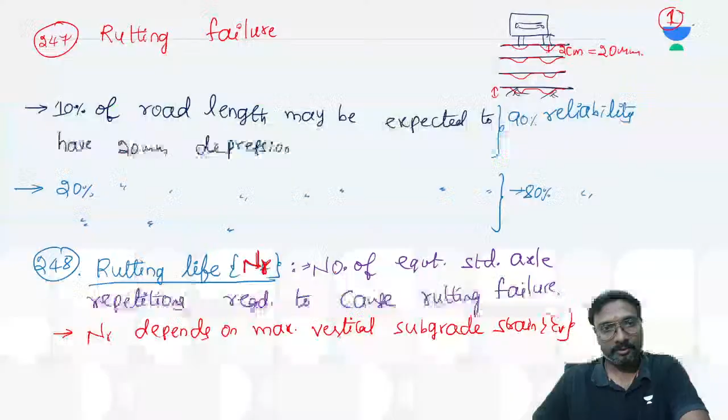So what was done - rutting, failure, fatigue, flexible pavement - everything gets covered, including indicative VDF values. This rigid pavement we have just started. In this, design life is already over - rigid pavement design life of 30 years and 20 years we have taken, because these values are different from flexible pavement values. In flexible pavement those values are different, and in rigid pavement those values are different.

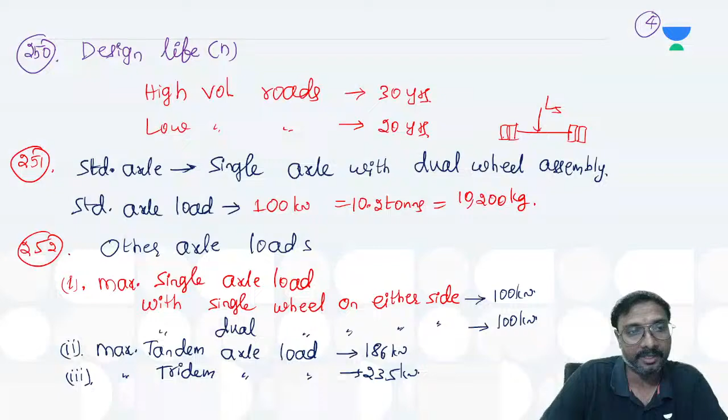Standard axles are also defined - 251, 252. For other axles also, we have defined the different standard loads we have to select. Apart from that, CSA, rigidity factor, vehicle damage factor, lane distribution factor, equivalent single wheel load factor, equivalent axle load factor, or equivalency factor - all are similar to flexible pavement only, so we are not writing separately. Extra parameters are radius of relative stiffness and equivalent radius of resisting section, those things L comma B.

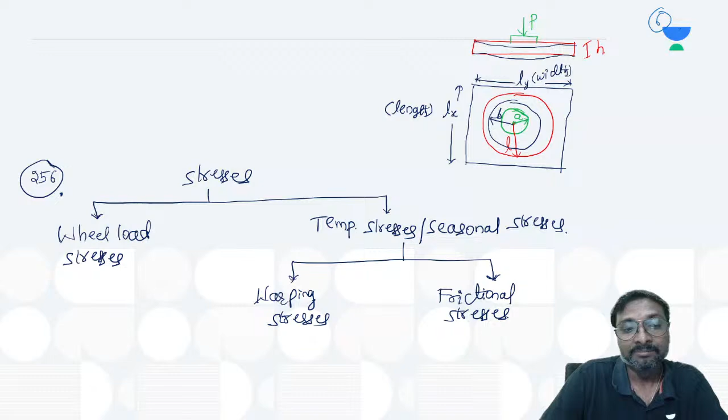And what is this one? These are the different stresses we'll be having. These are your different stresses.

Point 257: nature of wheel load stresses. Whenever it is interior wheel load, load is acting at the interior portion, so it acts like a simply supported slab. Whenever it acts like a simply supported slab, what happens - top compression and bottom tension.

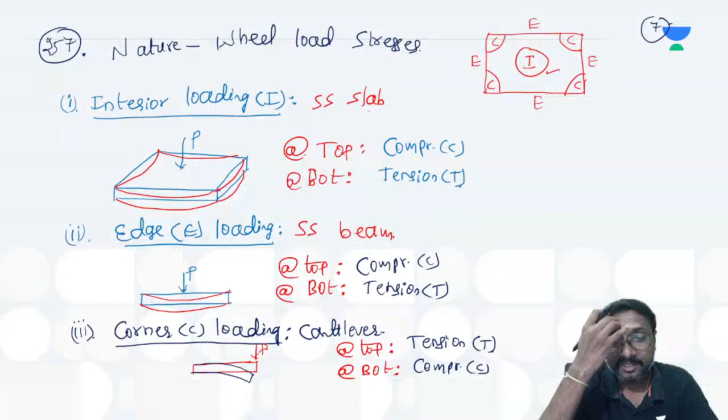Edge loading is like a simply supported beam, same top compression and bottom tension. Corner loading is top tension and bottom compression, because it has this cantilever behavior, if you just write it.

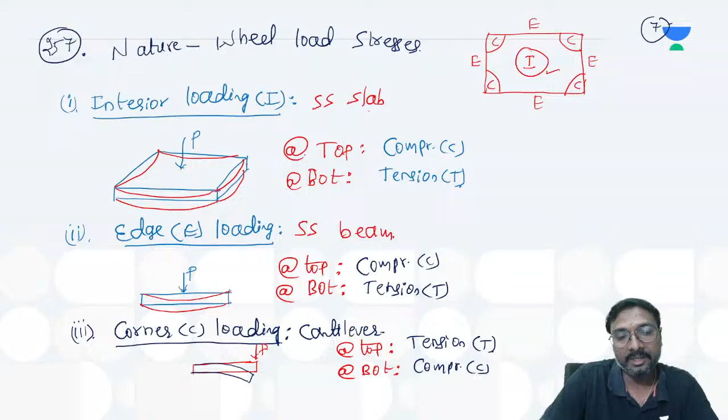Now shall we see first the values of these wheel load stresses? Then nature and all these things we'll see later. This is your 257th point - this 22nd class, quick revision of Highway Engineering, Rigid Pavement Part 2. And now 258th point.

This is your first slide for today's class. So wheel load stresses - nature of wheel load stresses we know, and the values of wheel load stresses we have to see. What are these values of wheel load stresses? If you observe, there are different formulae you are having - Westergaard formulae as well as IRC formulae.

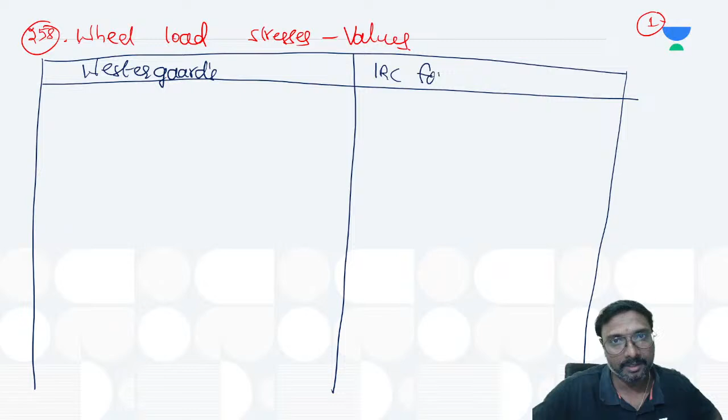So what is that Westergaard's formulae? Westergaard is the fellow who gave the formula for these slabs. Because we are considering slab action for rigid pavement, we need to also consider the same parameters as that of a slab only. Westergaard's formula, next is the IRC formula.

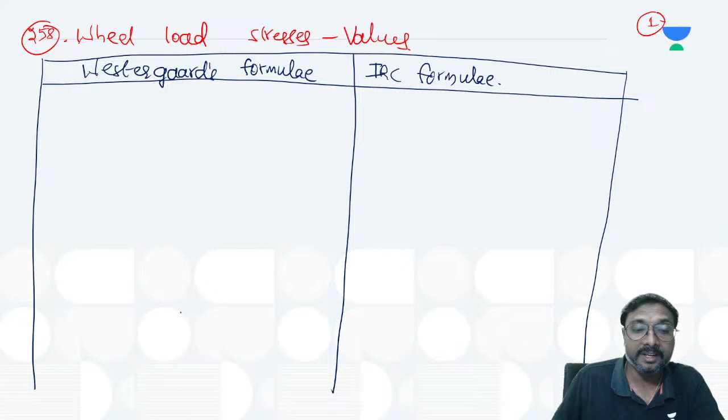Now three different loading conditions are there, and we have to calculate the stresses at these three different loading conditions only. What are these three different locations? If you observe, the three different locations will be interior loading, edge loading, as well as corner loading.

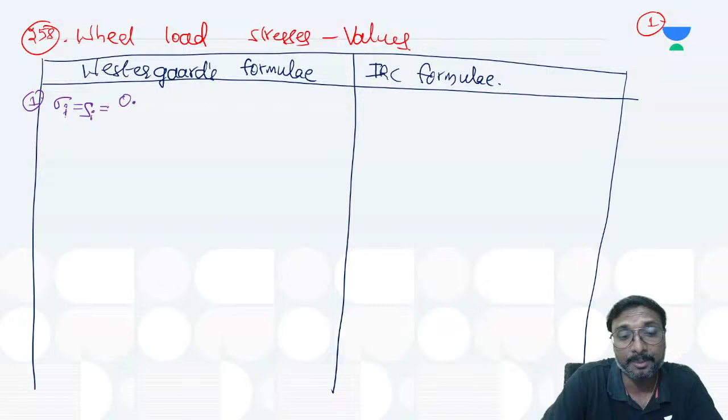So now what is the first one? Sigma I, SI - Sigma I is nothing but the stress, the wheel load stress, at the interior portion. Just no other suffix is given, means just sigma or SC is given. What is it? It is wheel load stress.

0.316 P by H square into 4 log L by B - you have to remember this, because sometimes they may ask you to identify the formula directly. Log to the base 10 plus 1.069 - this is given by Westergaard.

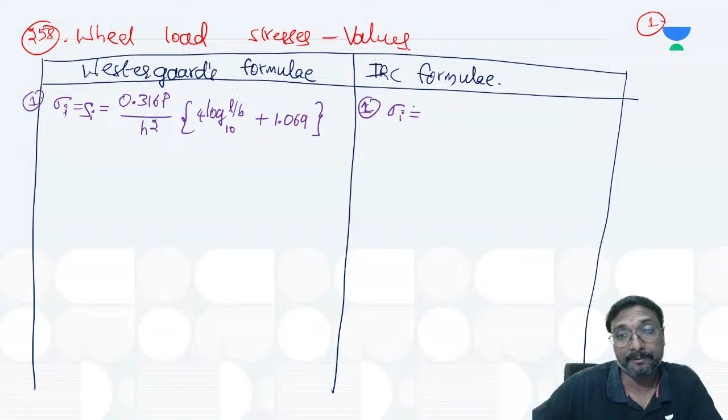First one, sigma I, IRC formula for interior loading. Sigma I or SI, if you observe, is the same. What is the meaning of this? Do is nothing but the same, if you observe. Next, what is the second one - edge stress, sigma E or SE will be equal to how much?

0.572 P by H square into 4 log L by B to the base 10 plus, instead of 1.069, it is 0.359.

But this IRC formula has been modified, if you observe. Sigma E, or SE, will be equal to 0.529 P by H square into 1 plus 0.54 mu, into 4 log L by B to the base 10 plus log B to the base 10 minus 0.4048. That is what you are having.

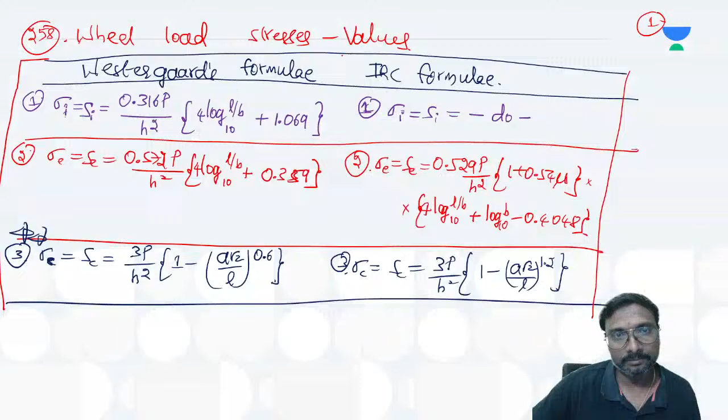This corner stress formula you have to remember compulsorily. Corner stress given by Westergaard is lesser than the corner stress given by IRC. So what does it mean? It means that IRC formulas are more conservative than Westergaard's formula.

What is the meaning of more conservative? Safer side, they will be giving. IRC formula will be giving higher stresses. Whenever it is giving higher stresses, you will be designing for these higher stresses, so is that safe side or not? Obviously yes.

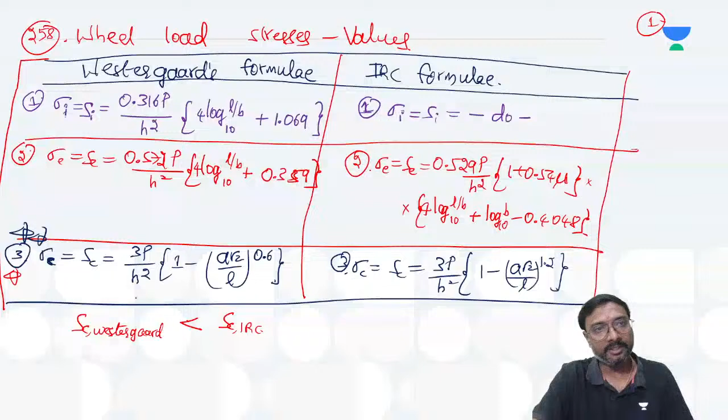So I'll be writing that point in the next slide: that is your 258 and this is your 259. So what is that IRC formula?

IRC formulas are more conservative than Westergaard's. Why is it like that? Since a root 2 by L is lesser than 1, automatically a root 2 by L power 0.6 will be higher than power 1.2. Now higher powers will result in a lesser value, because this value comes to be lesser than 1, so this kind of situation will arise.

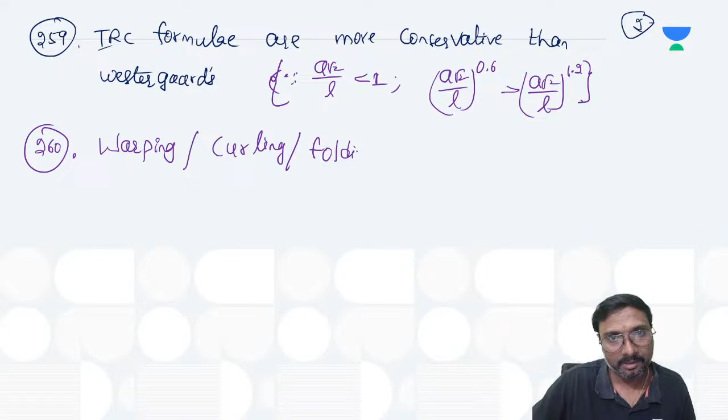So like that. Now the next stress will be warping stresses, or curling, or folding stresses. These are mainly due to temperature variation.

Temperature variation, if you just observe, isn't it?

Temperature variation - which one are we considering? Summer to winter, or daytime to nighttime and nighttime to daytime? These warping stresses in nature are mainly due to the daily variation of temperature.

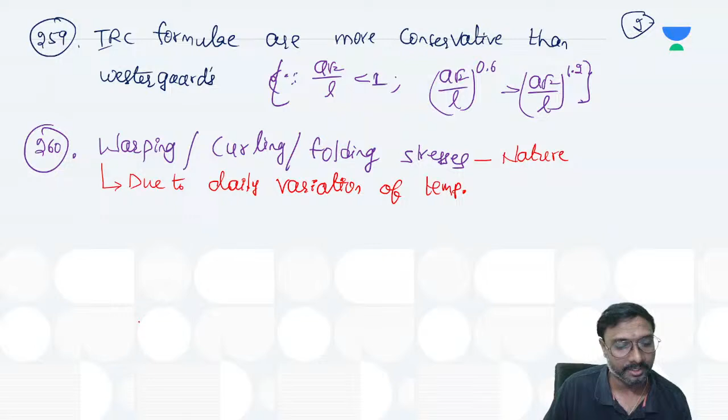Daily variation of temperature - consider daytime and nighttime. During the daytime, the sun will be there; during the night time, the moon will be there.

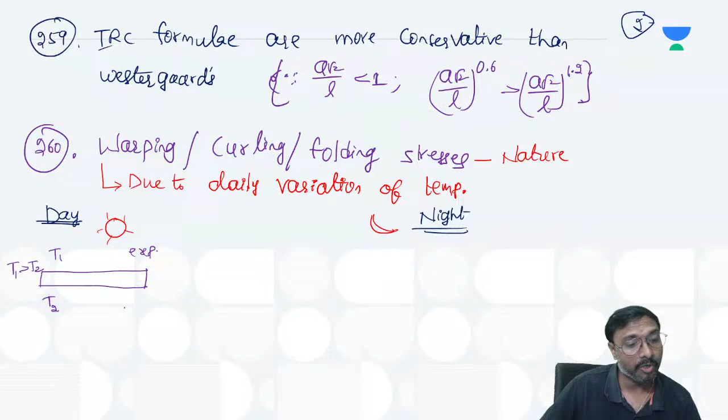Now consider the pavement. The top temperature will be T1 and the bottom temperature will be T2. Definitely T1, the top temperature, will be higher than T2, the bottom temperature. So top expansion will occur and bottom contraction will occur. Now it will be expanding in this manner - the deformation profile comes to be like this.

So top expansion, bottom contraction. Expansion means increase in dimension - how can you avoid that? By applying compressive resistance. So at the top you have to apply compressive resistance. Bottom contraction means decrease in dimension - how can you avoid that? By means of tensile resistance.

So what is the nature of stresses at the top and at the bottom? At the top, the nature of the stress is compression, because expansion will be resisted by compressive stresses only. At the bottom, it is tensile stresses, because contraction will be resisted. These are applicable at all three locations: interior, edge, as well as corner.

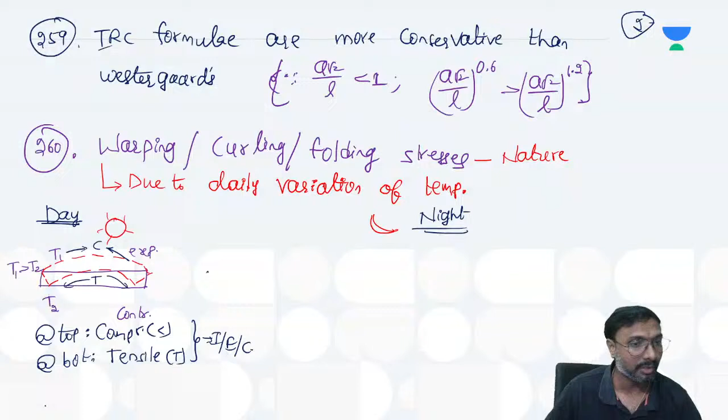Now during this daytime, is it warping or folding in the upward direction or downward direction? It is warping down. Here, higher temperature at the top, lesser temperature at the bottom - it is getting folded in this manner. So that is your warping down.

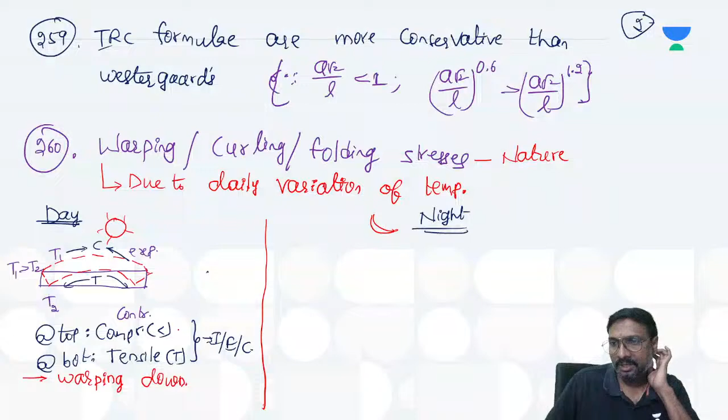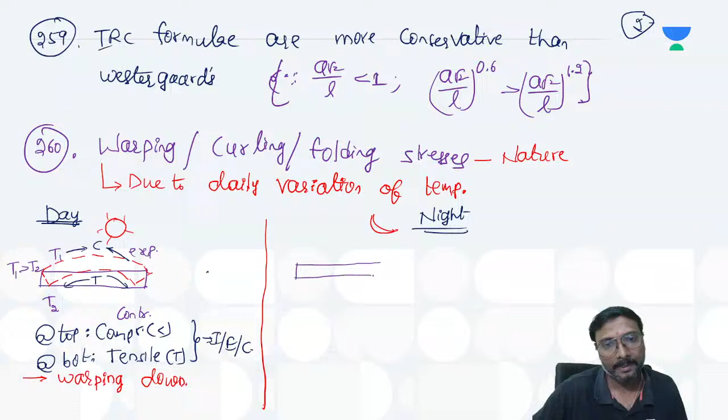Now coming to nighttime conditions - during nighttime, the bottom temperature will be higher and the top temperature will be lesser. So this is T1, top temperature, and this is T2, bottom temperature. Which one is higher? T1 will be lesser than T2. So bottom expansion will occur and the top will contract.

This bottom expansion will occur, right? What is the bottom expansion? If you just observe, expansion can be resisted by which one? This is a compressive resistance, this expansion at the bottom is resisted by this compressive resistance, na?

Contraction at the top will be resisted by which one? This is a tensile resistance, na? Isn't it? Resisted by this tensile resistance, right? So if you just observe what is the nature of these stresses at the top and bottom. At the top it will be tension, na?

At the top it will be tension, and at the bottom, right, what is it you can say? At the bottom it will be compression, na? So these are applicable for which one? This is interior edge as well as which one? This corner, right? Now if you just observe, temperature at the bottom is higher, temperature at the top is lesser,

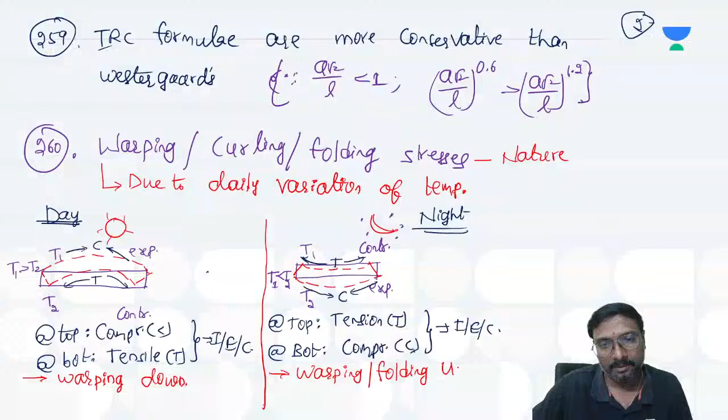So we'll be having this if you just observe. So warping stress under which condition, you can say? If we just observe, warping stress under this daytime and this nighttime condition, na? Warping stress under which condition, you can say? That is your daytime and nighttime conditions we have seen if you just observe. Is it? Yes, na? Like that.

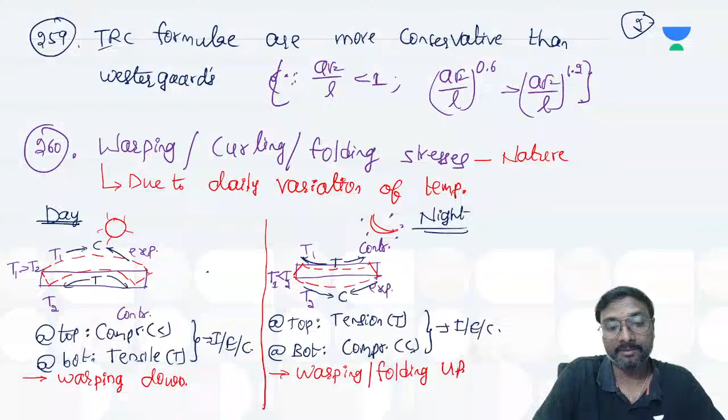So here, nature of this warping stresses is only important for us, or amount of this warping stress is also important, right? Amount of this warping stress is also important, obviously, na? Yes, that amount of warping stress is also important, right? That is your 260 and this is your 261 point. If you just observe, what is that warping stress values?

So these are given by which one? Bradbury's formula, na? These are given by which one? This Bradbury's formula, right? What are these Bradbury's formula if you just observe?

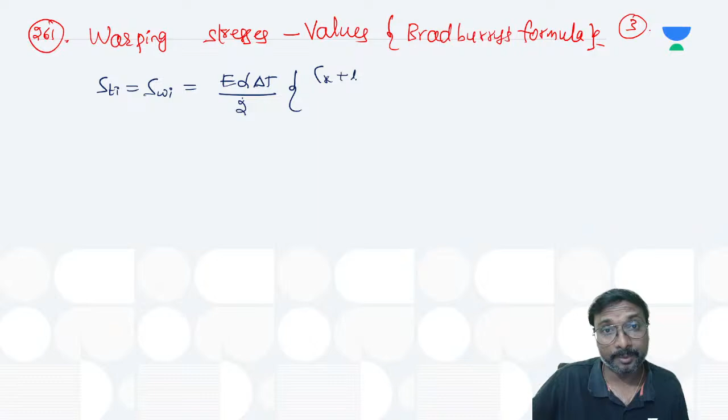So warping stress, temperature stress at this interior, you can also give the symbol W, warping stress at the interior, that is equal to which one? E alpha delta T. Delta T is the change in the temperature from daytime to nighttime and nighttime to daytime. E alpha delta T by 2 into, what is it you can say? Cx plus mu Cy divided by 1 minus mu square. That is for the interior portion.

And temperature stress at the edge, or warping stress at the edge, will be equal to which one? How many edges will be there? One edge is along the length, other edge is along the width. And E alpha delta T by 2 into Cx, this is along the length, na? Divided by, or you can say it as E alpha delta T by 2 into Cy, right? That is along the width, you can say if you just observe.

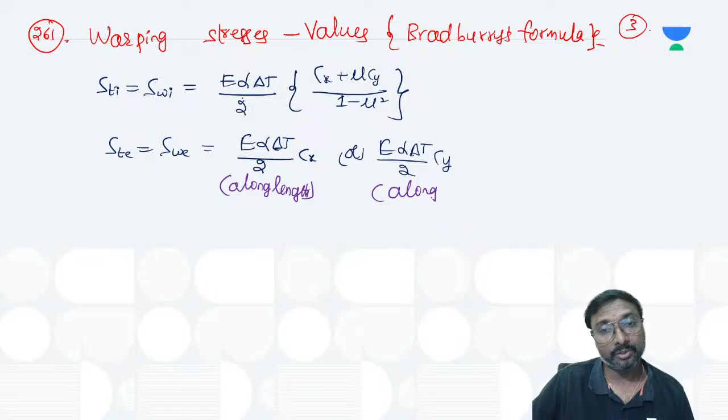Is it? Whenever that warping is occurring along the length, right, this will be used, na? Whenever the warping is along the width, we have to use this, na? That Lx will be the symbol used for which one? This length. Ly is the symbol used for which one? This width, you can say.

Now SWC, warping stress at the corner or temperature stress at the corner, right? What is it you can say? E alpha delta T by 3 into 1 minus mu into, what is it you can say? Under root A by L. What is that A, you can say? Radius of this wheel contact area, equivalent radius of this wheel contact area.

Originally it is rectangular curve, but we are converting that into which one? This equivalent circular, na? Yes. L is radius of relative stiffness, or radius of area over which stiffness is required.

That is what, or it is the radius of this area over which what happens, you know? Radius of this area over which what happens, that deflections will occur, right? Wherever deflections are occurring, there only we need that stiffness, definitely or not?

Yes. Suppose if deflections are not occurring, right, what is it you can say? Deflections are not occurring, right, what is it you can say? Stiffness is required or stiffness is not required, you can say, right? Stiffness is not required. Already stiffness is there, is it not? Right?

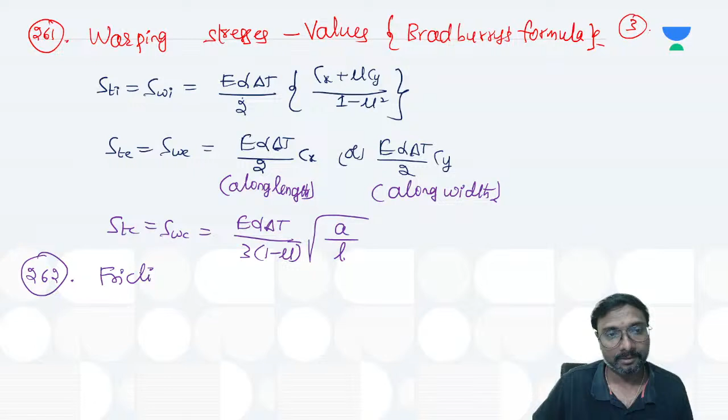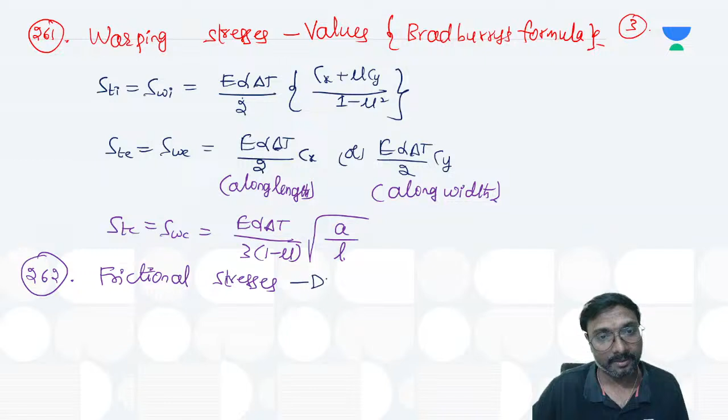Frictional stresses - what are these? If you just observe, these are mainly due to the seasonal variation of temperature, isn't it?

So what are these seasons? If you just observe, summer as well as winter. So whenever it is summer, what happens to frictional stresses?

Just the nature only we will consider, not the values. After that we'll write the values. And the nature of these stresses - whenever it is summer, what happens? Tell me.

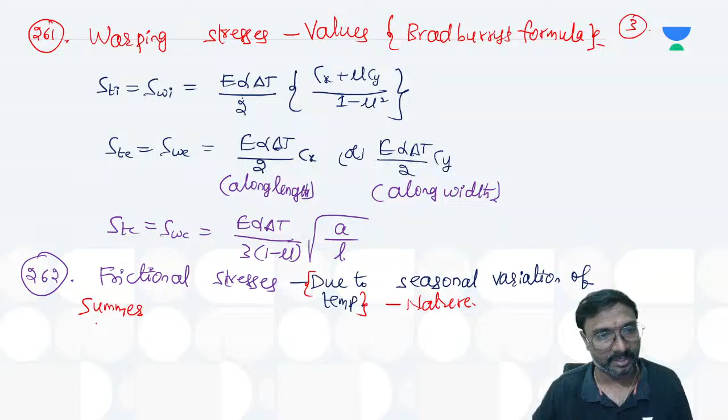Whenever it is summer, top and bottom expansion only will be there. This top and bottom expansion will be resisted by top and bottom compressive resistance - just now we have seen this, right? Top and bottom expansion will be resisted by top and bottom compression.

So top expansion, bottom also will be having this expansion only. So both expansion means it will be expanding like this, along the length, along the width also it will expand - I'm just showing it for one.

So top and bottom expansion will be resisted by top and bottom compression, obviously.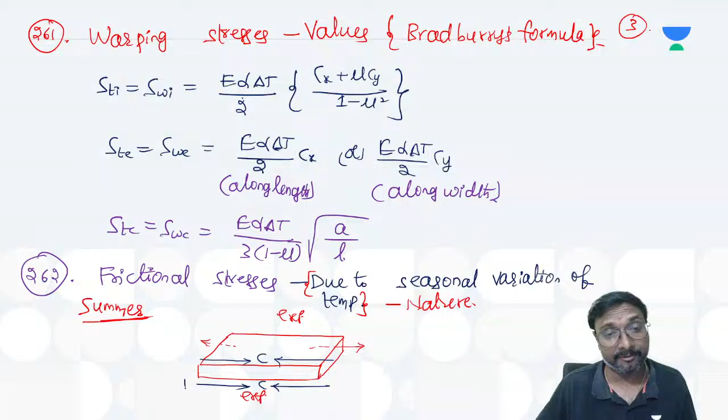Who will be creating that compression? That friction will be creating that compression. So what is that - coefficient of friction into normal reaction, right? You can say that is half of this weight.

So here, if you just observe, what is the nature of stresses at the top and at the bottom? You can say top and bottom - this expansion, top and bottom expansion will be resisted by top and bottom compressive stresses.

Compressive. So these are applicable for what? For the interior portion, edge portion, as well as corner portions. That is the nature of frictional stresses.

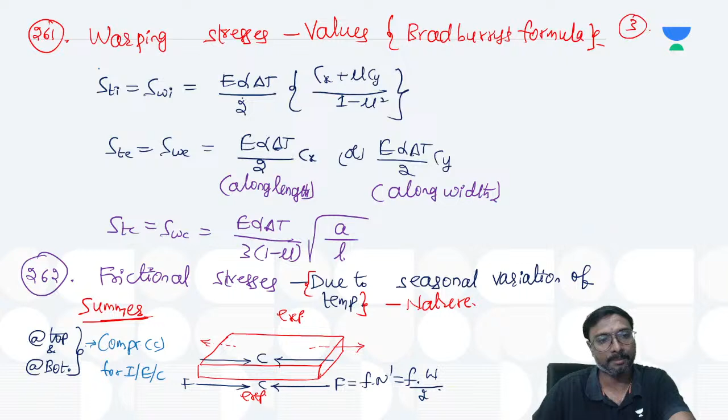Next - that is for summer. Similarly, directly I'll be writing. Similarly, what happens in winter? In winter, reverse process will happen.

At the top and bottom, whenever it is at the top and bottom, what happens? The nature of stresses will be tensile stresses. Nature of stresses will be what? Tensile.

Tensile stresses - these are applicable for which portions? Interior portion, edge portion, as well as corner portions.

Now, nature of these frictional stresses we know in summer and in winter. What is it - values of these frictional stresses, if you just observe?

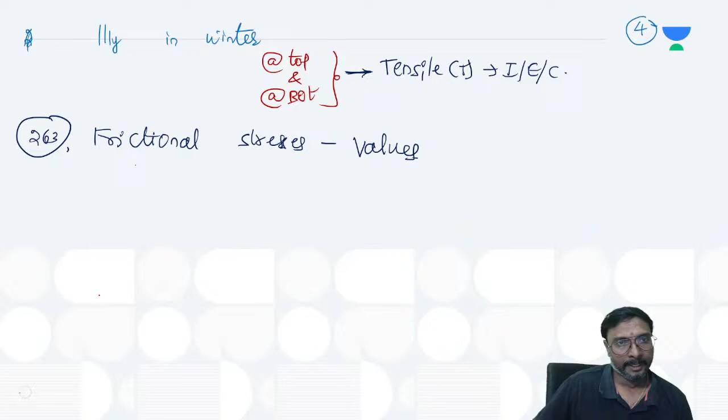How can you get these frictional stresses? Yes, Fi - what is it? SFI, frictional stress at interior. Yes, Fe - frictional stress at the edge will be equal to which one?

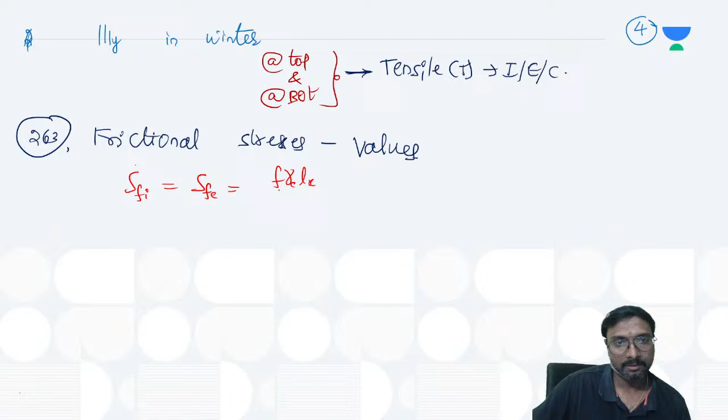F gamma C Lx by 2, or F gamma C Ly by 2. The first and foremost one is along the length - Lx is there along the length.

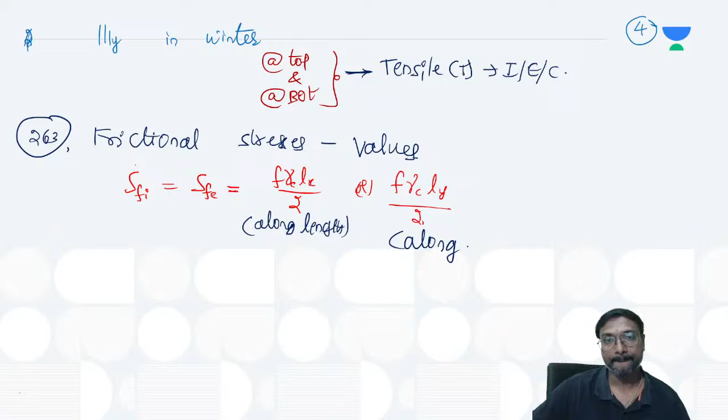Along this length and along this width, if you just put these. These are applicable for summer as well as winter.

Now what is that frictional stress at the corner - that is approximately equal to 0, you can say. This is approximately 0 if you just observe.

Like that. Okay, so now whenever you are considering this, that's what we'll do for today, and in the next class we'll continue our discussions.